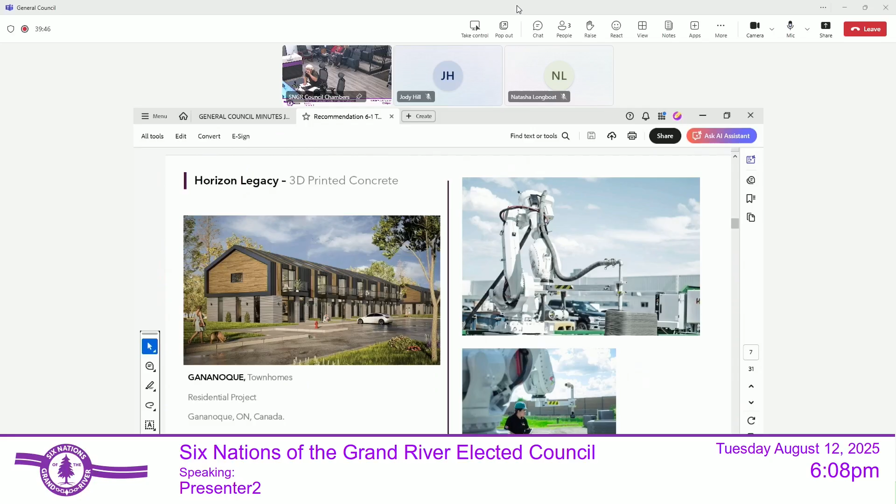Next please. So this is Horizon Legacy. On the left-hand side, you can see a project they did in Gananoque. The image on the top right is kind of what the robot looks like, and you can see the nozzle. What it basically does is print concrete in layers about 20 millimeters high and about 50 millimeters wide.

Next please. This gives you a close-up of what it looks like. The image on the left might be interesting because you can see spaces between the inside and outside walls that are printed. That provides space for liquid insulation to be poured into the cavity. So when the 3D printing is done and the liquid insulation is poured and cured, you've got a wall that's structural, has a lot of thermal mass, and performs well from a building envelope and insulation standpoint.

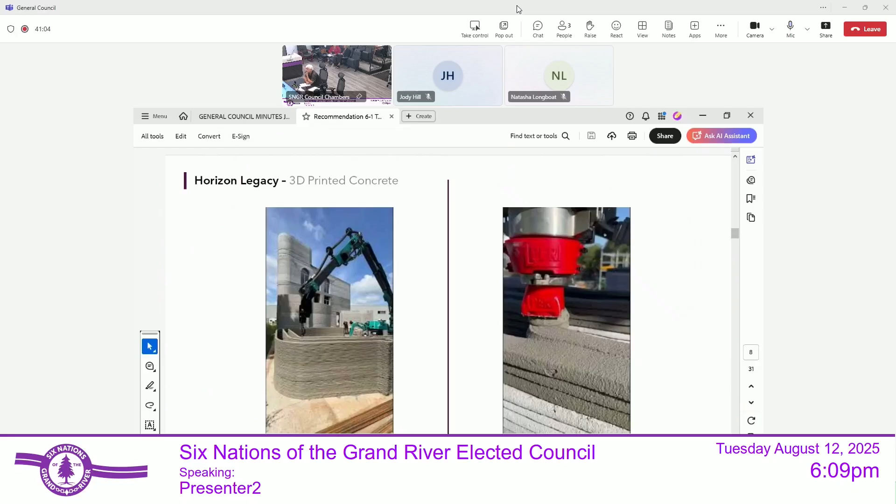That's one of the reasons why we're interested in it. Over the years, we've worked with structural insulated panels, we've worked with modular construction - I'm always interested in these technologies. Around 1995, I realized that if we wanted to contribute to solving the chronic housing shortage on reserves, you can't really do it just as an architect. You have to roll up your sleeves, get involved with manufacturing, and find ways to drive the prices down. So that's kind of why we got interested in this partnership with these guys.

Next please. And of course we all know what's going on in some of the remote communities in the north. They keep building these R2000 houses out of studs and drywall, and they last maybe 3 or 4 years. Houses designed for 5 or 6 people have to accommodate 15 or 16. You get high interior moisture content, the drywall rots, you get mold, but the feds still seem to be interested in perpetuating a technology that doesn't work. So we see this as a way to combat that a bit.

Next please. Again, I think we've all seen this kind of thing from places like Attawapiskat, Saskatchewan - these R2000 houses don't work. One of the things we're interested in with the 3D printed concrete is that it's robust. The concrete won't promote mold growth, and it's non-combustible, so it can't burn down - it's a lot safer. So again, these are some of the reasons why we're interested in these new technologies.

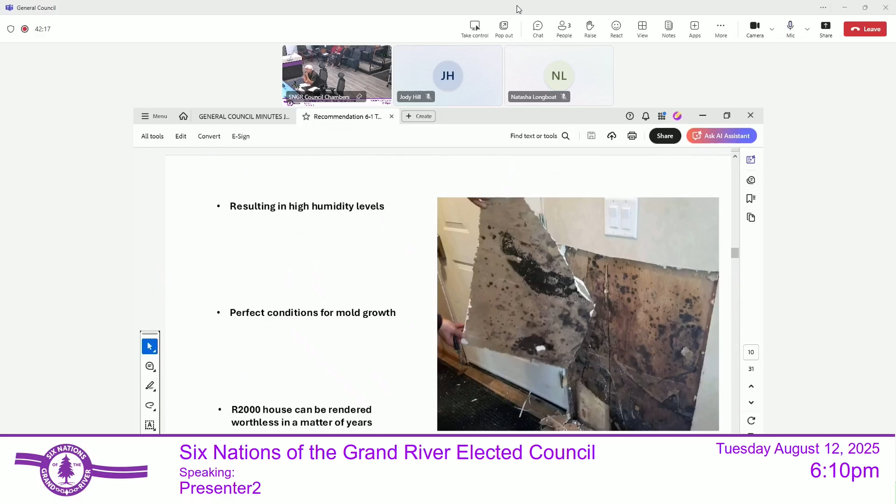Next please. If you draw the circle and look at where the housing is in Canada, everybody's pretty interested in the border between Canada and the US, but there's that whole area of Canada that no one's interested in building housing in. We're doing the pilot project here at Six Nations, but this is really the target area for this new construction. We want to solve this and get developments done in places that have short construction schedules and lots of unemployment in the wintertime. The idea would be if we can print these 3D printed envelopes in some of these communities, we could extend the construction season from maybe the 2 or 3 months they have now, to maybe 8 or 9 months a year. So that's part of what we're thinking about with this project.

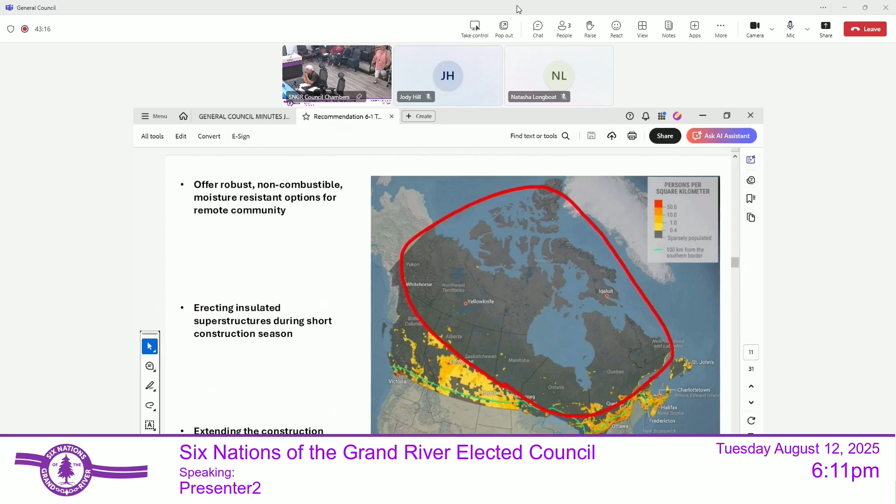Next please. We also took some inspiration from traditional indigenous architecture that I get inspired by - Cliff Palace out in Colorado, where it's built into the side of a cliff. It faces due south, so it takes advantage of passive solar heating. When the sun is high in the sky in summer, the brow of the cliff basically puts the whole development in shade. As the sun drops in wintertime, it opens up the development so it can get access to the beneficial passive solar from the sun. So I take a lot of inspiration from this stuff. Next please.

This is another one, Pueblo Bonito, that I like. If you take a look at it, the axis across the bottom is directly on the east-west axis, so this housing development acts like a giant sundial. The other thing it does is across the arc, across the back, it's higher, so it's almost like it's turning its back to the prevailing wind, opening itself out to the south. All of the communal areas are at front, and there's no contemporary architecture that competes with this. This is still the best stuff in North America.

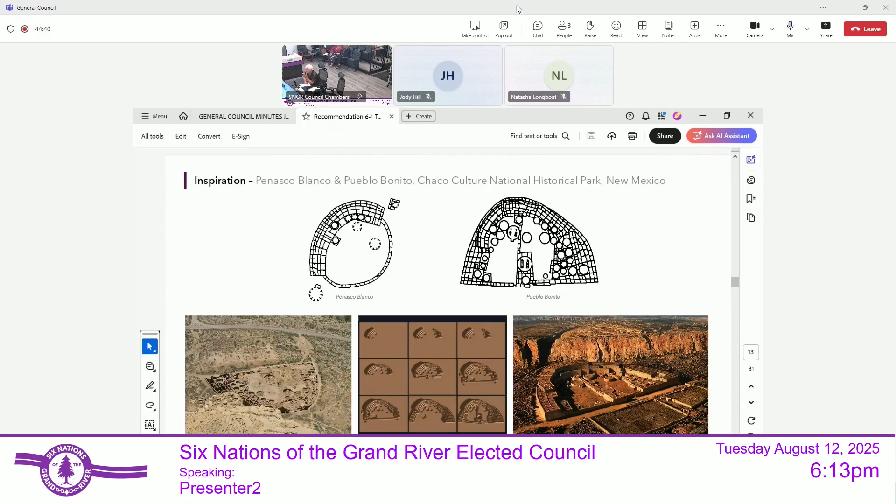So when we were putting our drawings together, we wanted to draw some inspiration from that. This is an exploded axonometric of our project, so you can see it's 3 stories, slab on grade.

The area at the bottom is the ground floor, and you can see how as we go up, we're stepping in to create these outdoor terraces that will be shared amenities for the tenants. We're targeting a little over 21,000 square feet, working with a construction budget of about 6.2 million, which equates to $290 a square foot, which is pretty competitive these days.

We've got a unit mix: 14 one-bedroom, 6 one-bedroom barrier-free, and 10 studios. That's what comprises the unit mix, so we're 30 in total.

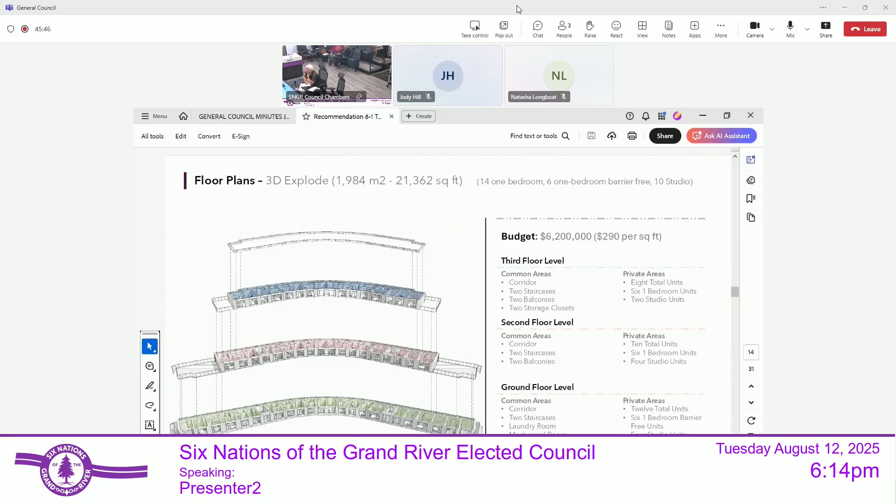This is what the ground floor looks like. It's served by 2 stair towers at the third points. It's a single loaded corridor, and like some of that traditional architecture, the wall that faces north is fairly solid. It's got a few windows in it, but it's mostly solid, and we're trying to get all of our glass on the south side, again to take advantage of passive solar heat gain.

This is the 2nd floor. Again, you can see how it steps back, the corners step in. We'll have 2 pretty generous roof terraces on this floor level that all of the residents will be able to access.

That's the 3rd floor, and it steps back again. So all the units are stacked vertically, so all of the demising walls line up, and all of the studios line up. This tan color here is a 1-bedroom, the blue color is a studio space, and each of them have their own dedicated washrooms.

So that's what the thing looks like. This is a bit of a blow up of one of the one-bedroom units. You can see it's got its own bathroom, a fairly generous bedroom, a galley-style kitchen, and they get lots of glass on the south side.

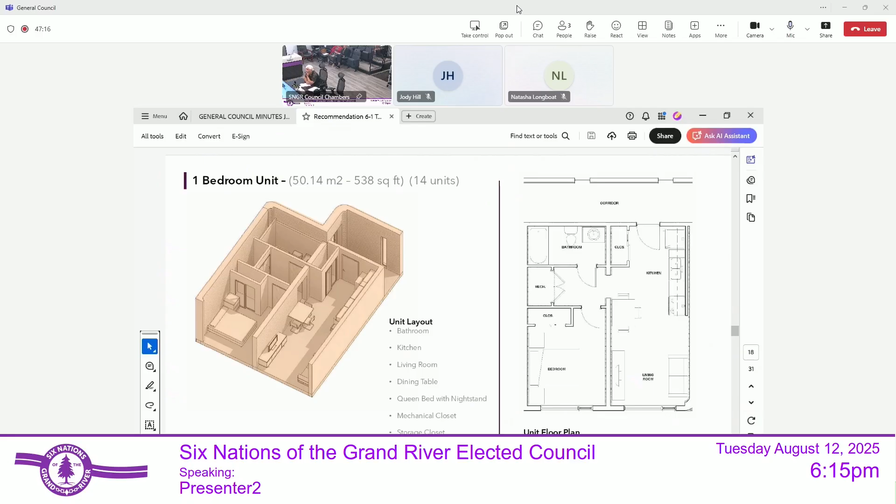This is one of the one-bedroom barrier-free units. We've got all of our turning radiuses, so if someone's in a wheelchair, all of the doors are wide enough and there's room to get a wheelchair in. We went with roll-in showers for these units, and we're going to go complete with electric heat pumps, kind of what you see in some of the latest hotels and motels. So no fossil fuel fired appliances, everything's electric, and that's kind of in keeping with trying to reduce our greenhouse gas emissions with this.

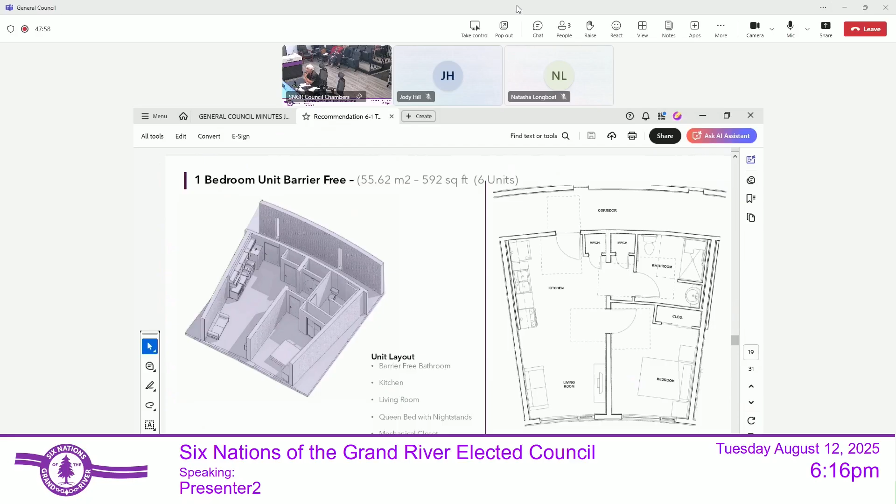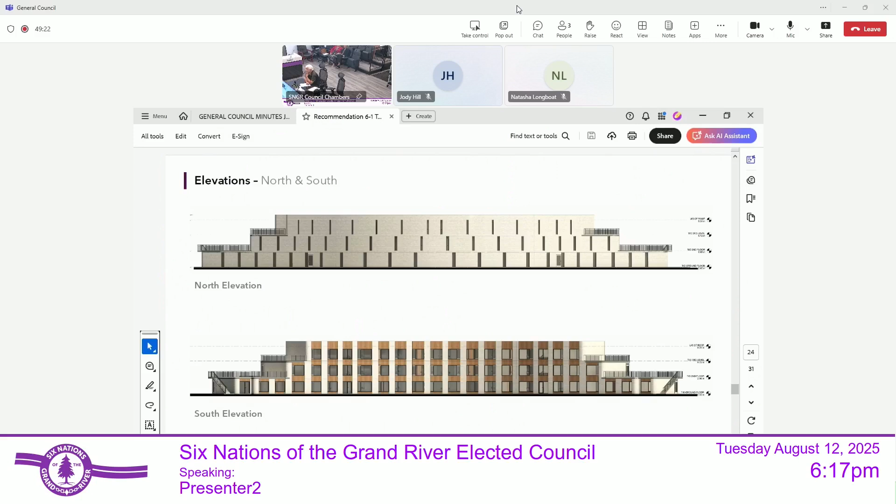So you can see the north elevation, again mostly solid, and then the south at the bottom is mostly glass. East and west elevations are kind of hard to read because it's curved, so it's hard to depict these things accurately, but you can see the roof terraces there on both levels.

How am I doing for time here? Close? I think we're just about done. So...

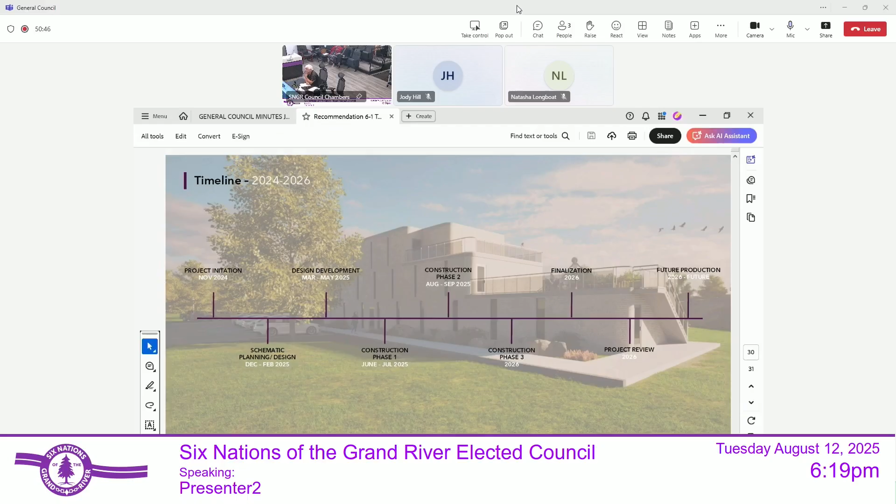So we really like our proximity. This is the development schedule. We're looking at trying to get as much of the 3D printing done before Christmas this year. If all goes well, we'd be looking at occupancy sort of next December, next January. So that's a little bit about where it is, what it looks like, why we're doing it.

Okay, thank you for your presentation. Is there any questions or comments? Go ahead, Cynthia.

I do believe I read correctly - every unit is either a one bedroom or a studio. Yeah, and you did note the overcrowding and such in one of these slides - what was the rationale for that? I think just because it's a pilot project, so we wanted to get a lot of units. And the other thing we found in the community is there's very few places for seniors to go, or couples that have been married and maybe want to spend time in the south. So the idea was if we could give them an option, maybe that would free up their houses for their kids to move into, and we'd be able to address families that way. But again, this is just the first one. We're hoping to do many more. But yeah, we focused on that.

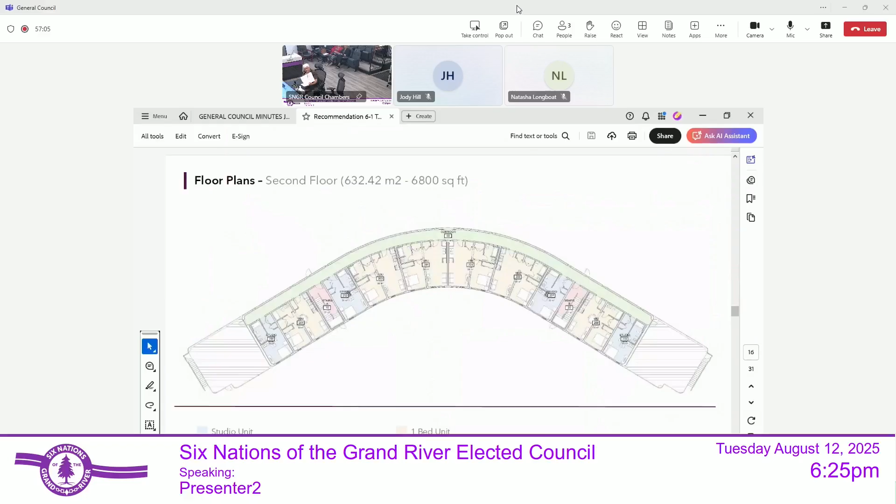Yeah. So who is profiting from the rent? Who's profiting? Well, I guess me. But to get the financing for this, the way we're financing this thing, we got a grant from NGen to develop the robot and the formulation. We're looking at about a $6.2 million long-term loan from CMHC to finance the thing.

Part of the financing included we had to have 30% of the units designated at an affordable housing rate, which gets determined by the average rate of apartment buildings in Brantford. But it does turn a net profit.

So Horizon Legacy is not profiting from the rent? We have an understanding with them that as soon as they don't want to be in the rental business - I've got an understanding with them that they would take the bulk of the first few years of net profit, and I would buy them out basically. So it would become my project.